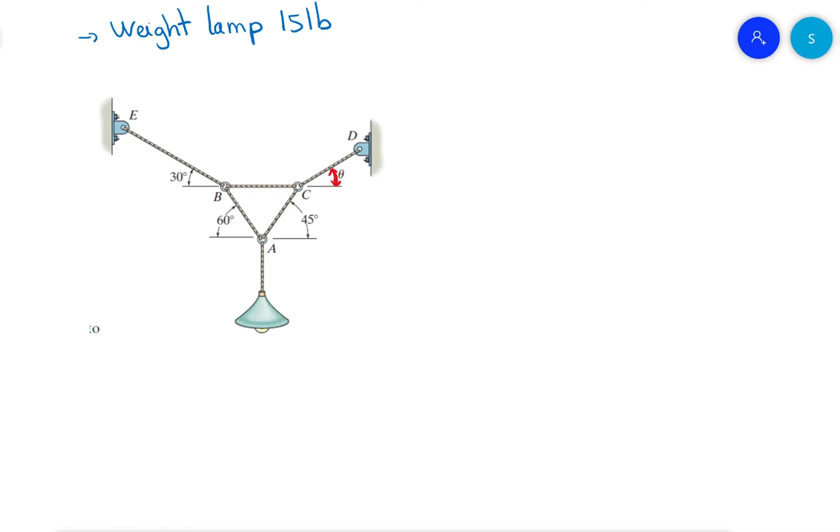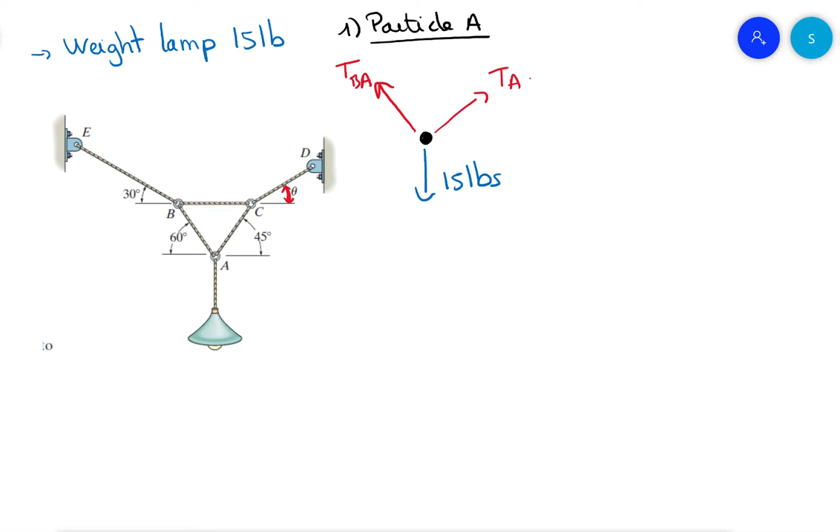They don't have the same angle. We will use the axis X and Y for all the free body diagrams. We have this angle 45 and 60 degrees. The simple way is to use the axis X and Y. You could choose your axis to have one of them, like TAC or TBA, on one of the axes to solve for one unknown at a time. That's a possibility, but I will use X and Y and a little system.

So we have sum of the forces on X equals 0. We have minus TBA cosine 60 plus TAC cosine 45 equals 0. I like to always write the same unknown, TBA first and TAC second.

So we'll do the same for sum of the forces on Y equals 0. For TBA, I have TBA sine 60 plus TAC sine 45 minus 15 equals 0. So we have two unknowns and two equations.

So we can use a little system of matrices. So what I use is with the inverse, and I got the answer there. That's a -1. So everything in front of TBA goes in the first column, in front of TAC goes in the second column. First equation, first row; second equation, second row. So we have minus cosine 60, cosine 45, and sine 60, and sine 45.

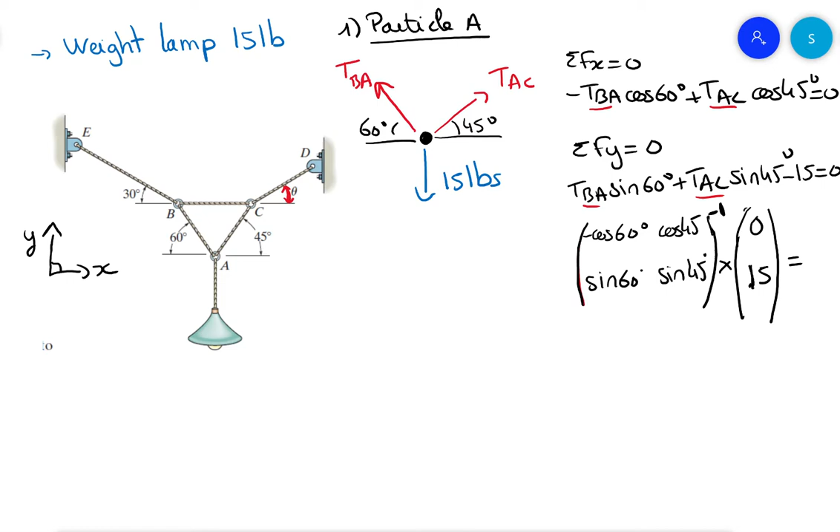And this one, we have the minus 15, so when you move it to the other side it becomes plus 15, and 0. So when you solve your matrix, you get the first answer as TBA, and the second answer as TAC.

So for TBA we found 11.0 pounds. Put it in your calculator or in your system that you use to solve on the internet. So let me highlight those two first answers, TBA and TAC.

So now, next point, we will use another particle. Which one do we use? Now we know this one, we know this one, we know this one. The ones that we don't know are TCD, TBC, TBE, and also theta. So the particle that we need to use is particle B, because we have just two unknowns at B. At C, we have three, because we don't know theta. So let's do the free body diagram for particle B.

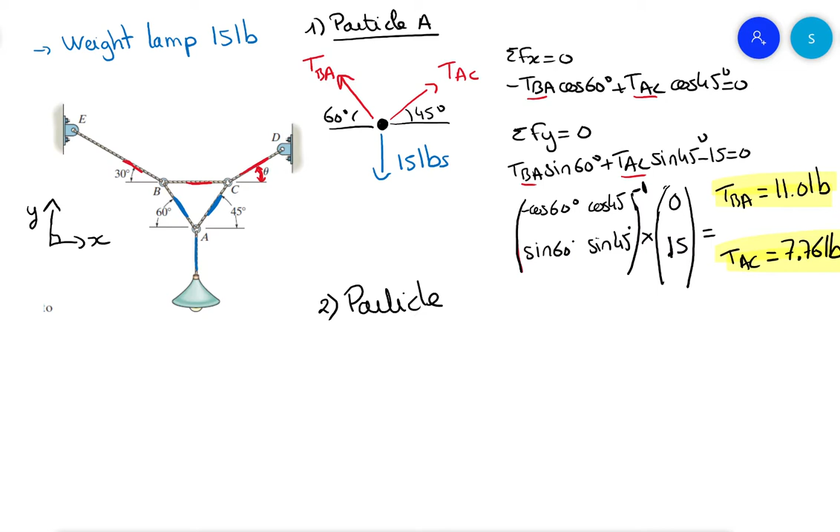So particle B, that was A, now that's B. We have TBA that is equal to 11 pounds, and we have TBC and TEB. And this angle is 30 degrees.

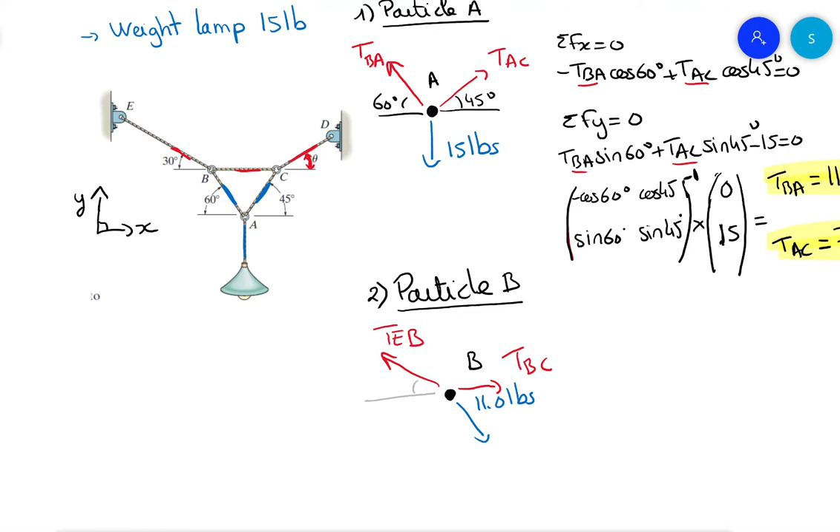So for this one, we will be able to solve one unknown at a time, because on Y we don't have TBC. But we need to begin with sum of the forces on Y. So let's do sum of the forces on Y equals 0. We got TEB sine 30. Oh, I forgot to put this axis there. That's TBA, so that's 60 degrees there, or 30 degrees on the top, right? So let's use the 30 degrees on the top.

So I say plus TEB sine 30, this complement, and minus 11 pounds cosine 30 equals 0. So we got TEB that is equal to 11 pounds cosine 30 divided by sine 30. That's 19.

How much did I get? I just check my answers.

Okay, yes, 19.0 pound. Okay, that's for TEB. And now we can solve for sum of the forces on X.

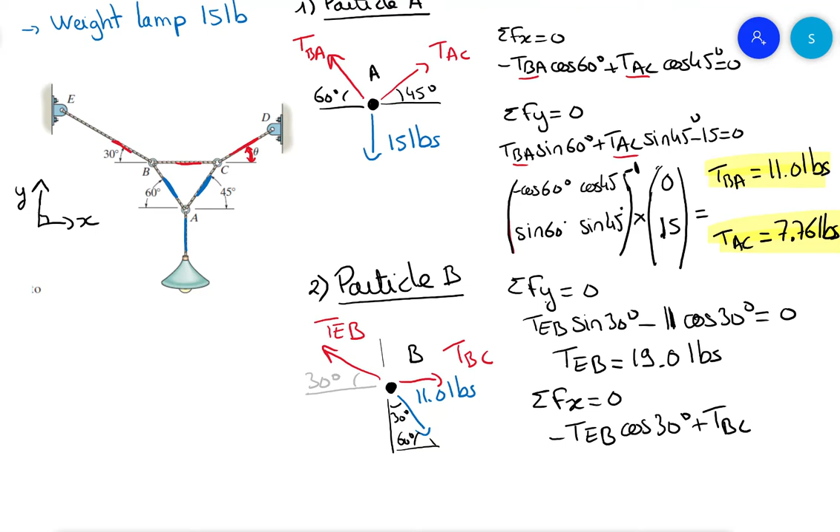It's equal to 0. So we got minus TEB cosine 30 plus TBC, and plus the component on X for the 11 pounds, so plus 11 sine 30 equals 0. So we have TEB that is equal to...

Other side, so minus TBC. How much is TBC? Oh no, that's TBC that we are looking for, sorry. I need to do that. TBC is what we are looking for, and TEB, now we just got it there.

So we have TBC that is equal to 19 cosine 30 minus 11 sine 30. So 19 cosine 30 minus 11 sine 30, that's 10.95. That's funny, everything is really close to exact number. So it's 11.0 pounds. Okay, let me add them.

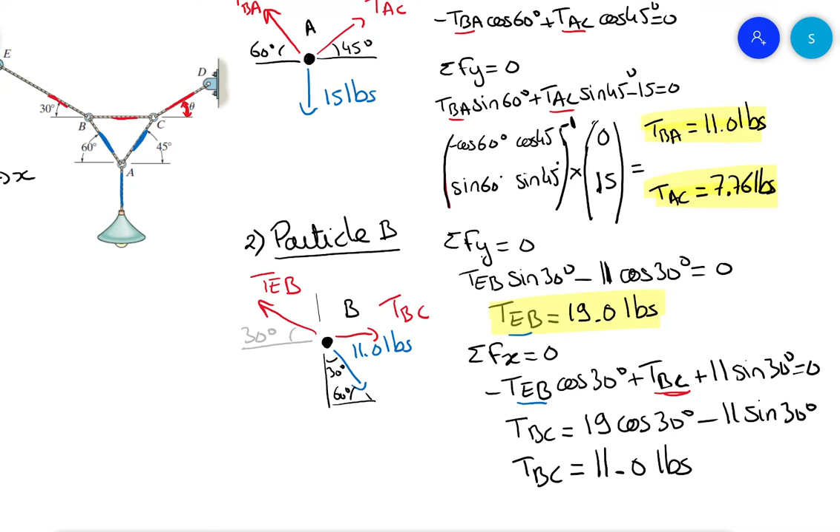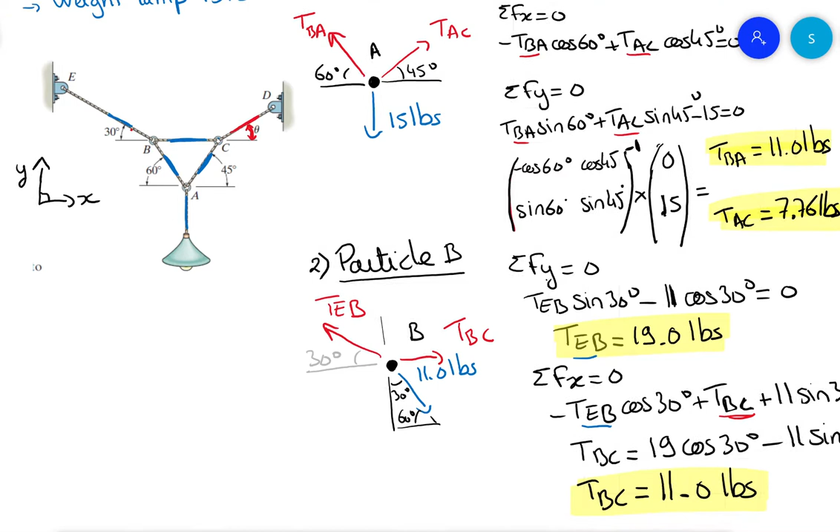So TEB and TBC, so now we have this one and this one in blue. And we can go at the particle C to find our two last unknown, theta, and I will show you how we find theta because it's very common that we need to use the same steps that we will do. So number 3, I will do the particle C.

Particle C, the force that we know, TBC, we found 11 pounds. And this one at 45 degrees is TAC, so that's 7.76 pounds, and we have a 45 degrees angle. Here we go. And the force that we don't know is TCD, and we don't know the angle theta.

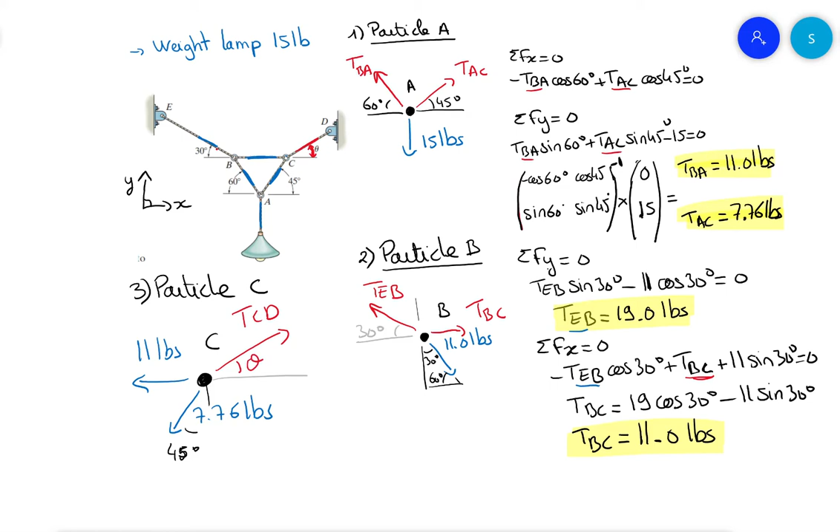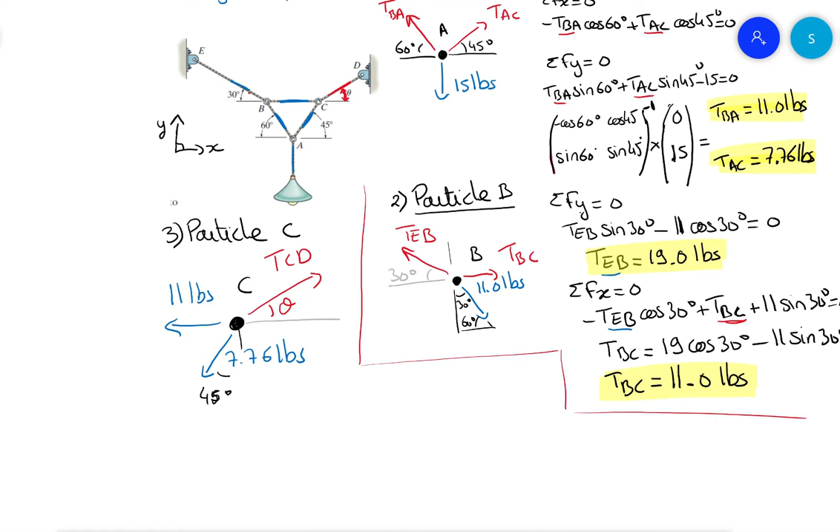Okay, so we need to write the two equations on X and Y, and you will see what we will have. Let me make it on the left.

So when we do sum of the forces on X equals 0 from the particle C, what we have is TCD cosine theta minus 11 minus 7.76 sine 45 equals 0. So we got TCD cosine theta that is equal to 11 plus 7.76 sine 45. Try to keep your exact number.

That's 16.5. Okay, and now when we do sum of the forces on Y equals 0, we got TCD sine theta minus 7.76 cosine 45 equals 0.

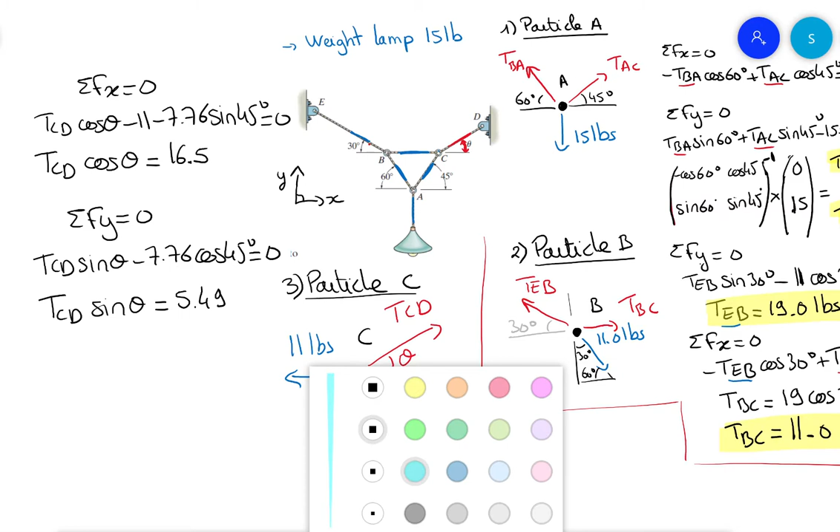5.49. What are we doing when we have a TCD cosine theta and a TCD sine theta? It's always the same, you will end up with those two equations a lot. So what you will do is you will do the equation number 1 divided by the equation number 2.

So 1 divided by 2 on both sides. First equation, TCD sine theta equal 5.49. Second equation, TCD cosine theta is equal to 16.5.

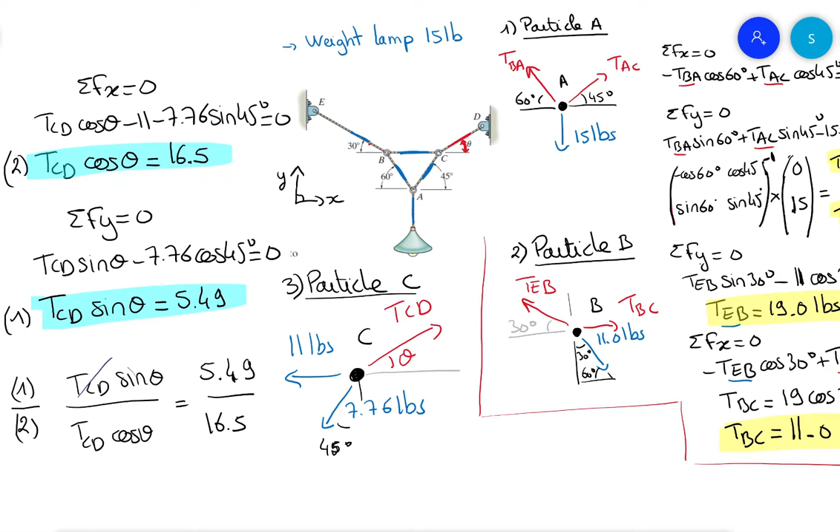TCD, and sine theta divided by cosine theta is tangent theta, equal this 5.49 divided by 16.5. And you solve for theta using the inverse tangent, so inverse tangent of this one divided by this one.

That gives you 18.4 degrees. Okay. And final steps, you use one of the two equations that you have before. So let's, for example, use this one. And we replace theta by this value.

So second step, we use TCD cosine 18.4 degrees is equal to 16.5. And we ended up with TCD that is equal to this one divided by cosine of the angle that you just found. That's 17.4 pounds.

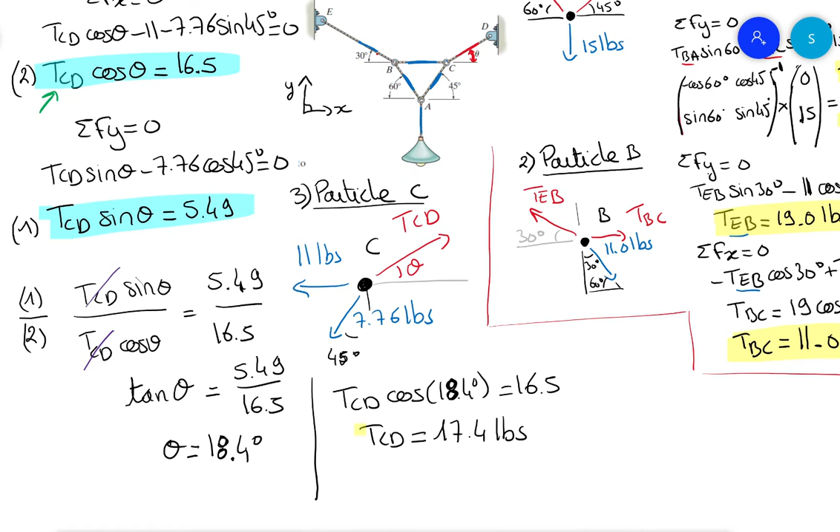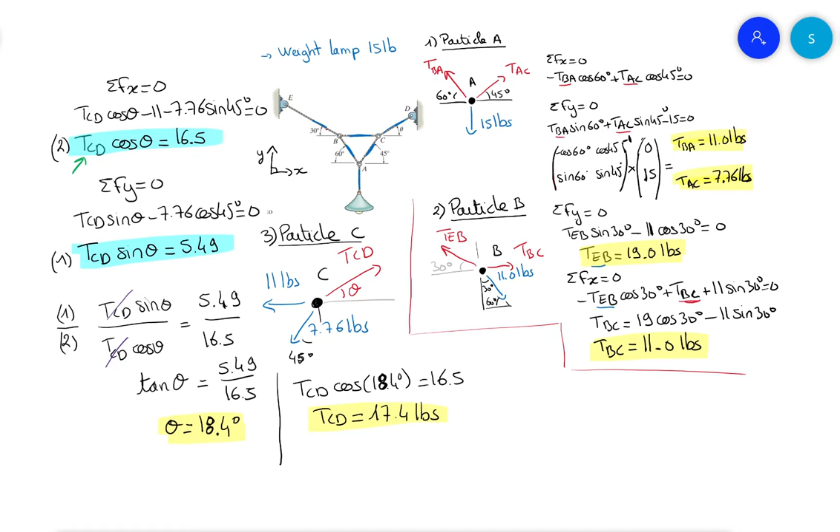And let me highlight the answers, I use the yellow for the answers. TCD, theta, and that was our two last unknowns. So we can put them now in blue on the graph. This one and this one are blue.

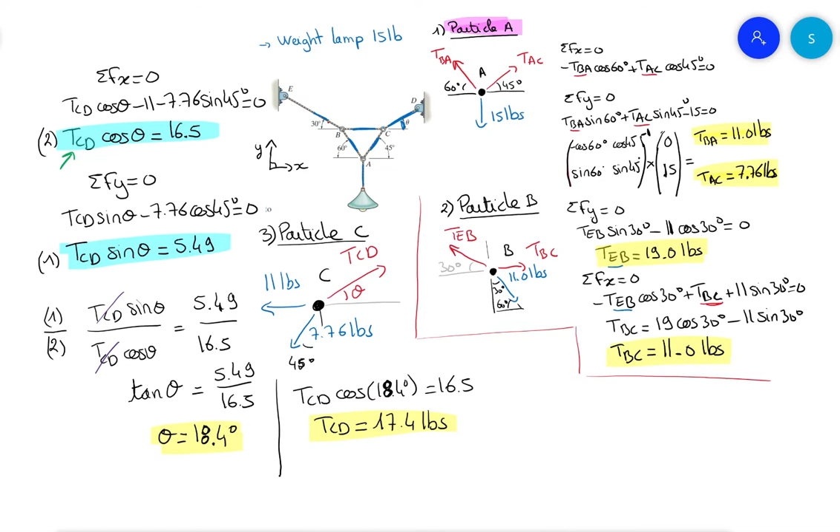So we did one step at a time. Let me put everything there. We did first the particle A, we solved for TAB and TAC. Second, we used the particle B, we solved for TEB and TBC using one equation at a time. And after that, we use the particle C, free body diagrams, we solve for theta and then TCD. One step at a time.

The difficulty there is like if you make a mistake at the beginning, everything, there will be a mistake for each answer. So take your time to look at your sign and check that your answer makes sense. The weight of the lamp was 15 pounds. And look at the pounds, we have 11, 8, 19. The more there is an angle, the more it's bigger. So TEB has a 30 degrees angle only, so that's normal that it increased the tension in the rope, and TCD 17.4. So yeah, I think everything made completely sense.